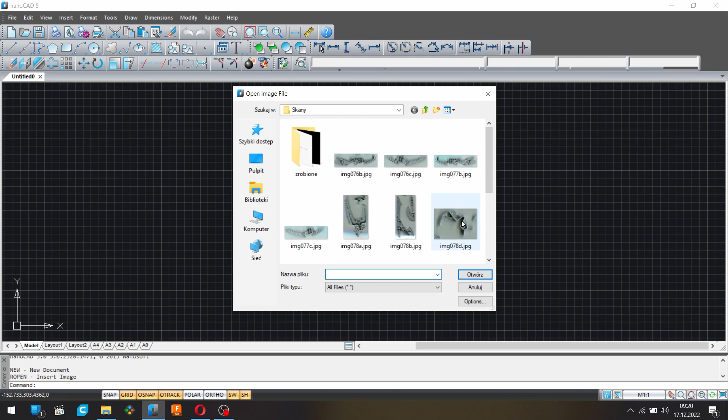We're going to model something small and easy today, because I hope to do it all in one go from start to finish. This is one side. It was D, so now we need 7, 8, 7, 9. Here we go. I'm going to save it. Drawing 15. Okay.

When I sketch on reference pictures, I like to change my line color to red. It's much better to see. Unless the part is red, of course, then you want something like bright green.

I make my reference pictures by scanning the parts flat. You could scan them in 3D, which is much more advanced and useful for bigger, more complicated parts. But for small parts like this, the flat 2D scan is perfectly fine.

But I also have the part itself in my hands, so I can rotate it, I can look how certain features look from the side, and I also have calipers that I'm going to be using to take some dimensions that are hard to take from the reference itself, or dimensions that cannot be taken, like the third dimension, the height, because we have width and length, but we don't have height, so we'll have to check the height with the calipers on the real part.

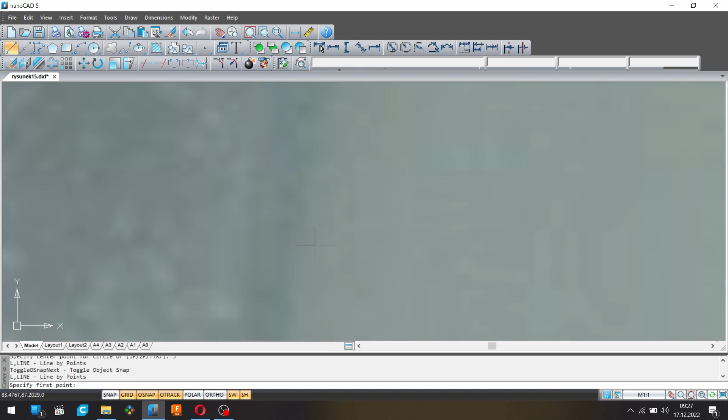So again, we're going to zoom in, not too much, because if we zoom too much you can't see anything. And we're going to zoom just the right amount, pick the point on the line, and now we are not going to pick the other point because it's harder to again aim. We're going to go past the line and align those 2 parts so they're the same angle, and there we go. So now this line will be our reference.

Now we need to rotate this picture so this line is parallel to our grid lines. The way I like to do this, we're going to move it a little so we have space. I like to rotate the reference so the line is in the right upper quadrant. The angle here is not really important.

Now we make a horizontal line. We mirror our first line, and now if we rotate from this point, we can just grab this point, and now our first line is horizontal. We can rotate it by 90 degrees, so it's more convenient. Oh, come on, F8, there you go, and now our line is at a perfect angle.

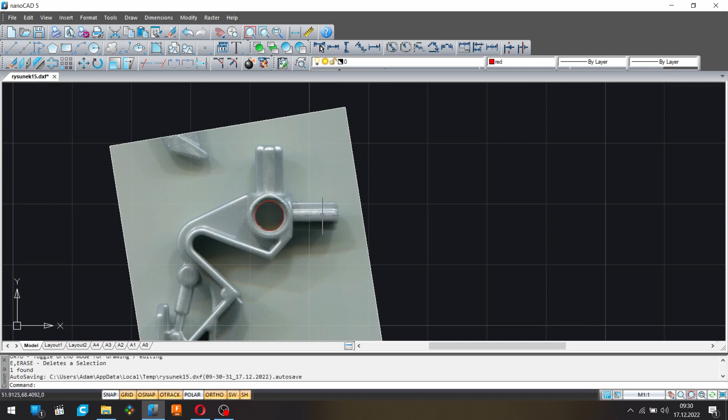The easier one is to use the knowledge that the Lego connection points, whether they are Technic pinholes or big connectors, are on the grid, and the grid is 8 millimeters. The features on the grid are 8 millimeters apart. So if we have a part with 2 pinholes, not necessarily one next to another, you know that the distance between them is a multiplication of 8 millimeters. So you could find the center of those holes the same way we did for this one, measure them, count how many 8 millimeters should be between them, and scale the reference appropriately.

I find that it's not very accurate. Sometimes you could introduce error into this, especially if the pinholes are very close to one another.

So actually the better way is to find the longest distance on the part that you can, draw it, see how long it is, and then measure the actual part with your calipers and use this measurement to scale the part. It's much more accurate, and I like to do this way.

Alright, so I'm looking at my part. Sorry, I don't have the camera on the part, you can see what I'm doing with my hands, but the stream was very last minute.

It's because basically I can do this only on weekends, and next weekend is Christmas. Wait, no, is it? Yeah, next week is Christmas already. The weekend after that is New Year's Eve. So the next time we could possibly do this would be 3 weeks from now. So this was the last time we could do this, and I'm not very well prepared, but I think we can manage it, and you'll have to forgive me because it's a first stream. I promise it will get better if I do this on a regular basis.

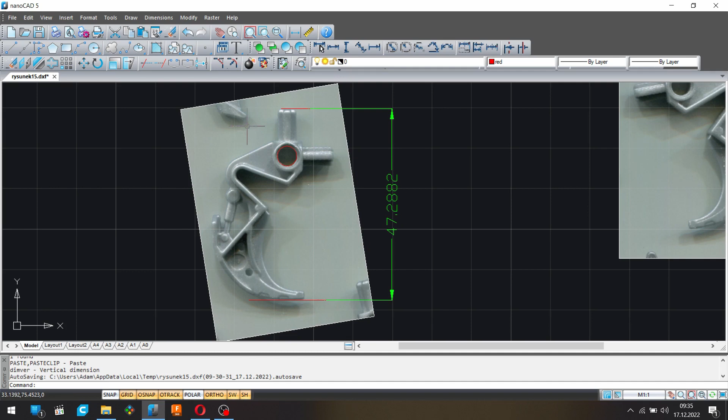And I found by doing this many times on many different reference scans that my scanner scans the parts almost perfectly, almost to a one-to-one scale. But if I double check and correct it a little bit, the parts will only be better for that. So now I'm going to use my two dimensions, the physical one and this one, to scale this reference image to the perfect one-to-one scale.

So I'm going to use a calculator. I'm going to put the dimension that I want first, so it's 47.04, divided by the dimension I have, 47.2882. And this is our scale factor that we need to scale it to. I'm not going to write this, I'm going to copy this.

I'm going to scale this whole group. Specify scale factor, we need to change to a comma, and there we go. You can see that now the length is the perfect 47.04 that we measured from the part.

So now we can expect this whole part to be perfectly scaled. Now we need to do the whole thing again to the other reference. Sometimes if the part is symmetrical, you can get away with doing only one side, because everything on the other side is in the perfectly same place. But in this part, although it looks symmetrical, there is a small difference at this injection port. Here it's concave, convex - it's inside of the part, and here there's a dome, it's sticking out. So to basically pick up this diameter, which would be extremely hard to measure with calipers, we will have to use the other side too.

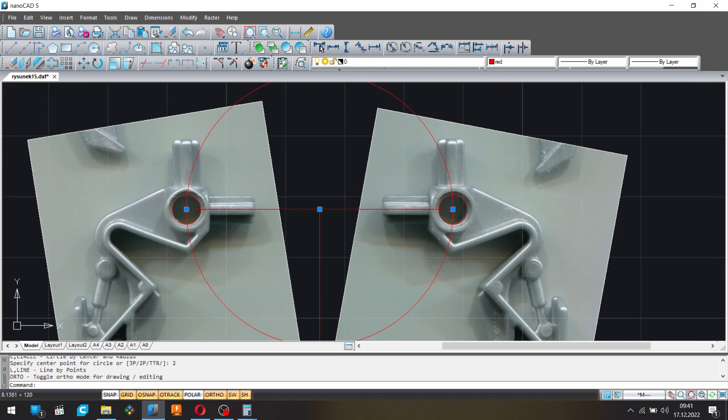Okay, we will just have to add a mirror line between them, right in the center. And we don't need anything on this reference, because we'll be first working on this side, then flip it and only adjust the differences.

Okay, so now we will use our center of a circle, but we won't be using our circle because it's some weird dimension that we don't know and is probably not accurate. We're going to use our dimensions of the Lego pinhole that we know, and those are 3 circles. I'm going by diameters, so it's 4.95, dimension 6.3 diameter, and the last one is D for diameter, 7.4.

We don't need our line, and you can see that the part is scaled very well. We can trust our dimensions of this reference, and we can now start drawing the shape of the part.

We will be using nanoCAD to draw the flat reference, and then we are going to import it to Fusion 360, and we're going to add our third dimension there. We're going to 3D model our part, and you could actually skip the nanoCAD and do this whole thing in Fusion - import the reference pictures to Fusion, draw the reference there, and do everything in one program. The reason I do this way, there are actually 2 reasons.

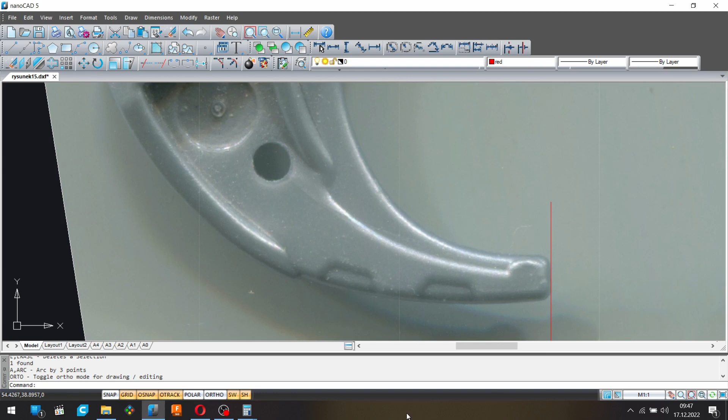So we'll have to do it like this. Almost the same length - this one is a little bit longer. It goes to this point here.

Okay, we need three points to pick up the arc, and the farther they are spread apart, the more accurate the arc will be. So we'll start here - here's one, here's the second one.

And now again we could use a point, but you can see that the difference right in this region can get pretty big pretty fast. So rather than specifying a point, I'm going to go past the end of the arc and, looking at this region and this region, find the best way to click so the arc is as tangent as we can across the entire length. Okay, here we go.

Those lines will cross here, so we can extend it. Now we will use the center of this arc to pick up this smaller arc, because those two arcs, while having different radii, are concentric.

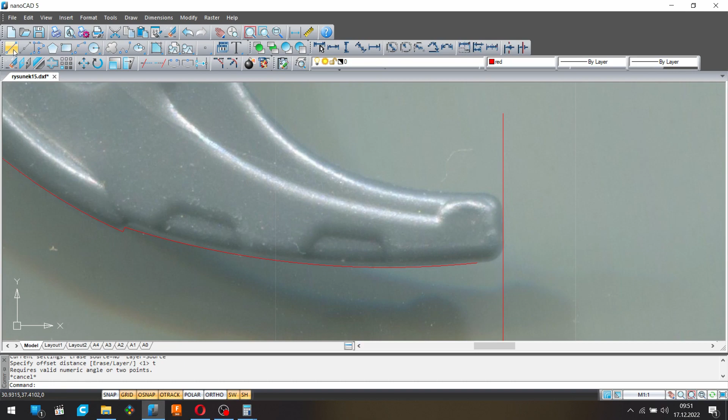It's very inconvenient. So we're going to measure the distance between this line and this line. It's kind of a hacky way, but you have to work with the program on its own terms. 0.94 - so it's probably 0.95 originally, and we're going to use this.

So we put in the offset, 0.95, enter. We can offset this line. You can see that it lines up perfectly.

Now we need the size of those cutouts. Oh no, right, let's start here. Let's do this side, right about here. Let's do this side.

Now, we could draw the fourth line, but the angle between those two lines and those two lines would be different - it would be very hard to pick up the same angle. So we're going to make it easier on ourselves by using the left cutout we already drew.

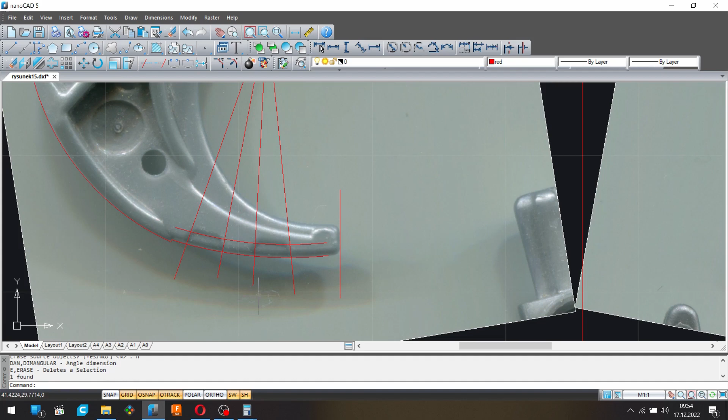Now we can be certain - I can actually prove it to you. Here we have, oh, it's not very accurate, I'd have to change the accuracy, but we have around 9 degrees, and here is the same. So we now don't need this line at all - we can trim away all the excess.

Now we'll just have to round off these edges. Another feature that was very useful in AutoCAD for this - and isn't working, or I don't know how to do this in this program - is you could draw a circle that was tangent to 3 lines.

So what I would normally do with this corner is just draw a third line that's also tangent to this rounded corner, and then use those 3 lines to make a perfect rounded corner that matches the reference. You can't do this in this program.

The only way is to use 2 tangential lines, and for the third dimension you have to specify the radius. So it's not very convenient, not very accurate, but the other way to do this is to use a 3-point circle.

Measure - let's do this here - measure with 3 points the radius of this corner. Oh, come on. There we go. We're doing this just to know the radius. 0.45.

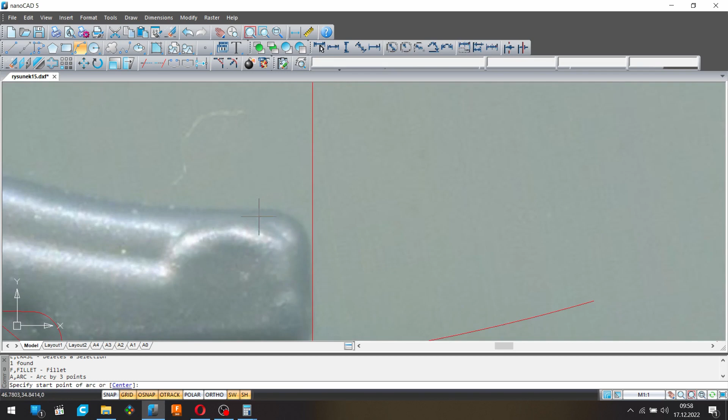We can now do the same thing from the other side. And again it drops off, and we can approximate this curvature with two arcs. Sometimes the shape is more complex, the arc might change more drastically, or there are some other geometries involved, but here we are fine with just two arcs.

But now the challenge is to make them tangential. Again, in AutoCAD it was very easy to do. I won't bore you with the details, but here we have to again do a little bit of a hack job, unfortunately.

Let's find the center. Here we go. Now let's do TTR - tangent, tangent, and our radius was 8.1, and you can see now that those two, the arc and the circle, are perfectly tangential. So again, trim off the excess, and we made this beautiful curve with two arcs that are perfectly tangential.

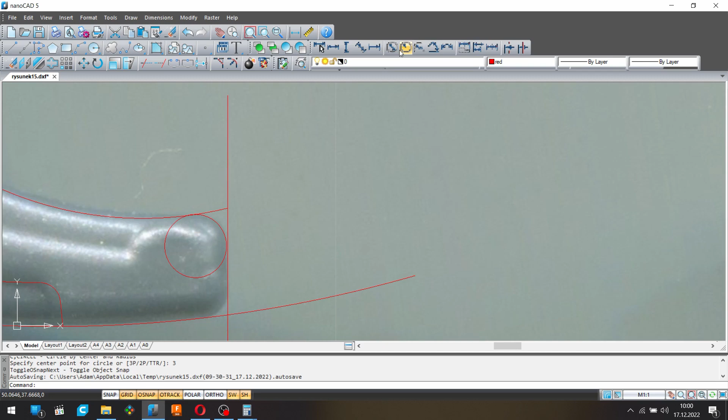We need to round off these corners. Again, we will measure them with a 3-point circle. There we go.

We have another tooth here, this little step, but those two lines, the bigger one right here and the little one right here, are parallel. So we can actually find out the angle first from the bigger one. We can now use this as a reference.

There are some more details here that I would need to create this corner, but I'm going to move along. We're going to circle around and come back to here. There's no particular reason for it - I just sometimes like to leave a little more challenging stuff for the later time. I just like to go with the flow as I do this.

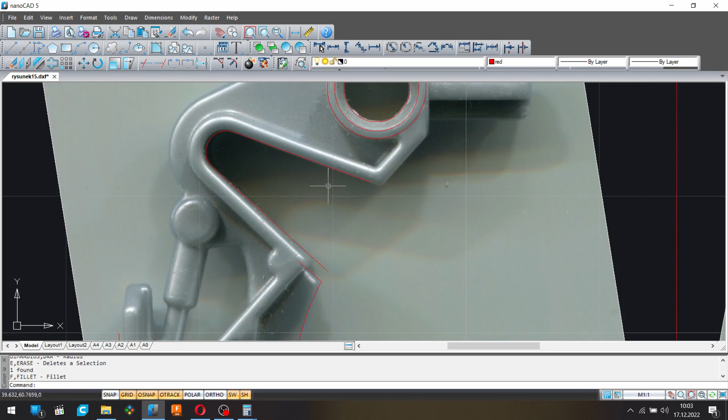I'm going to shorten this line so we don't mistake it for data for this line - this is something different. So let's just sit here for now. Okay, now we can make this corner around here.

Wait, actually, give me one more minute. Oh, there we go. I put on some music, but I have to use my headphones so you can't hear it, and Instagram won't flag me for the copyrighted music.

Okay, now we can continue. Those lines. Oh no, I can't hear myself think with the music - I wouldn't be able to comment. So no music for me, but turn on music you like to accompany this stream. We would have music if Instagram would be a little more tolerant.

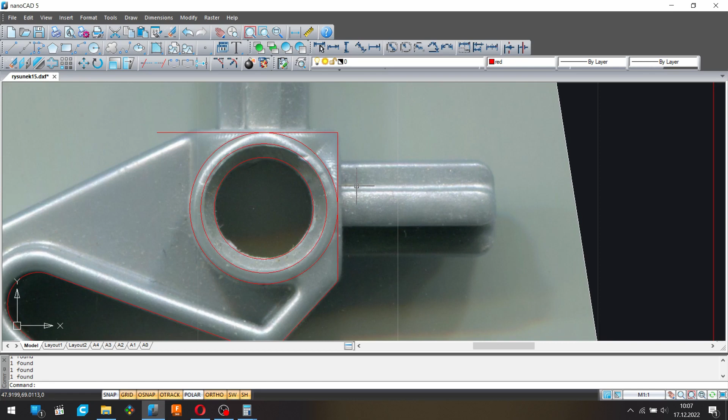So there is a cylinder here that is a base for a disconnection point, and there is a half of a cylinder here for a disconnection point. But it doesn't really matter, we can just draw the outside dimension. We don't need to draw the line where those two cylinders merge - it would be of no use to us in the 3D modeling software, and it will come out naturally as we model this. The only thing is to remember that when you 3D model, make cylinders here and not just flat, and everything will turn out the same way as it is here. So we can ignore it for now.

I don't want to catch the beginning of this arc, so we'll go back a little. Let's say here.

Are those two circles concentrical? Yes, they are. So we can use this. Oh no, we will have a problem with this being tangent to this line. Ah, damn it.

Damn you, nanoCAD. Why don't you have so many cool options that AutoCAD has? How do I do this?

I think I'll have to go the other way with it. I'll have to start with the circle and now do this line again.

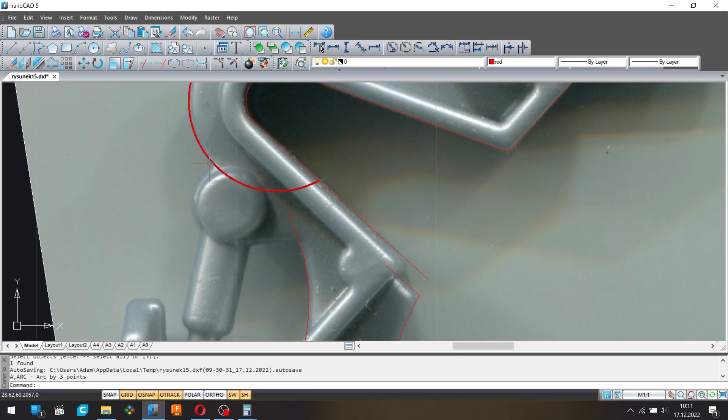When we pick up the center of this hinge for the piston, we can draw the outline. So let's just skip this for now. Skipping...

Skipping features in certain places can be very dangerous and can come back to bite you in the ass, because it might be difficult to remember all the places you skipped. That's why I wanted to skip those parts first, but I stopped myself and thought let's do them now, because I wasn't certain I would remember to come back to them.

So when you have a big part, try not to skip certain places. It will come up eventually when you import the sketch to 3D modeling software and you have gaps. You don't have closed profiles, you can't extrude from them, and it will be clear where you skipped something and where you need to come back and redo it.

But you would have to open the sketching software again, redo this, import the sketch again to the program. It's just a pain in the ass. So if you skip it, be sure that you remember to come back to it.

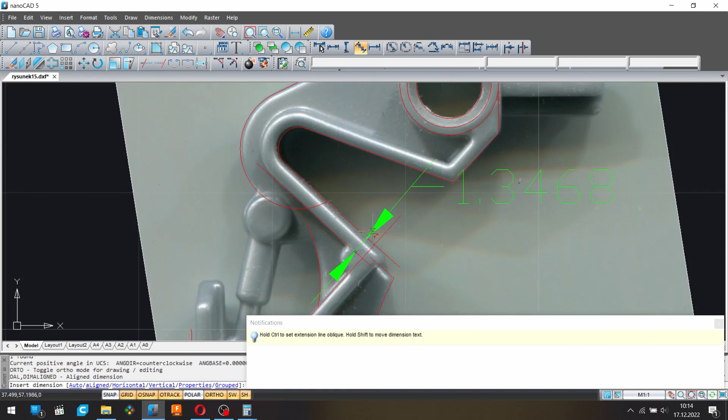What the hell? Maybe let's cheat a little. Take this, okay, now it will be easier. 1.35 is the dimension.

We use the offset command. 1.35, and now we can go crazy with the offsetting. This offsets to here, this to here, this to here, this to here, this to here, this to here. Yeah, it's the same offset, so we can do this one also.

I think that's everything. Now let's patch all the connections. Don't need this, don't need this, this. Now we have our nice corner.

We'll come back to round it off in a minute. Everything's okay here, trim this. We'll round this off in a minute.

Okay, seems everything is fine. Now we can do this circle. Go.

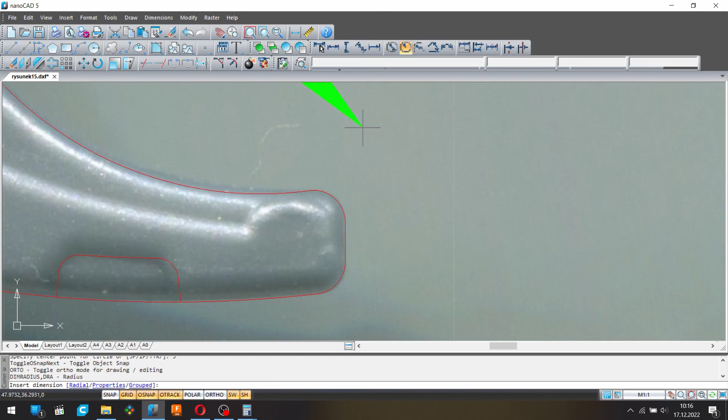0.56. How was it here? 0.7. Will 0.7 work here to keep it consistent? Let's see how 0.7 looks. Yeah, kind of. Looks okay, we can use 0.7.

Okay, going on the same path. Here we go. Here we go.

There, maybe we'll have to see in the 3D phase if it's even possible. I won't be rounding off the internal corners, I'll just leave them as they are here. The only one we have to absolutely do is this one, so the lines connect.

Again, I was trying to do the AutoCAD thing, draw a third line and define the circle with 3 tangential lines. You can do this. Let's measure this corner with 3 points.

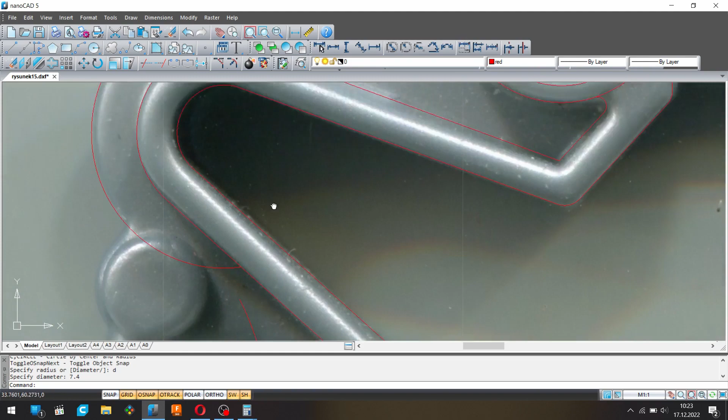This corner is fine, everything is fine. I'll try to remember that from this line up everything is already finished, so I won't be going back there to even check.

Okay, maybe let's tackle this piston now. Pistons are very fun to make on the Bionicle parts, as long as you have a prepared certain approach to them. I like to do it in this way.

First, I pick up the two hinges. This one. This one. And the line between the two centers. Come on. Here we go.

Center is our axis of both of those two cylinders, and we also picked up the angle of the sides, so we can use this line to pick up the diameter of both cylinders, the bigger one and the smaller one.

There we go. But you might suspect that the distance from this line to the center and this line to the center probably isn't the same, and you can actually even see it that this dimension is much bigger than this one.

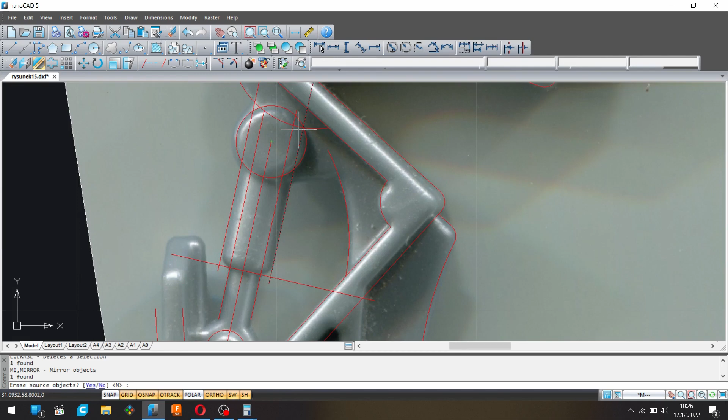Let's do this one more time so you can understand better what I'm doing here. I draw those two lines, and now if I mirror this part from our axis, we'll actually get rid of the original one. Yes, now they are both on the one side.

The one from this side disappeared. It's this one here. Now you can see that there is a difference between them. So if we moved this line to this line, then we would have the same gap on this side. So to make both of the sides happy, we'll find a line that's between them.

Let's use this one. We don't need this. And now the line is not as accurate to this side, but if we mirror it back to the right side, you can see that the gap we have here, we also have here.

So both lines are the same distance from the best lines they could be, and now we can revolve it and do a cylinder out of this profile, and it will be the closest we can pick up to the original size. So now we'll do the same thing with the smaller diameter.

Again, let's do it a little quicker. There we go.

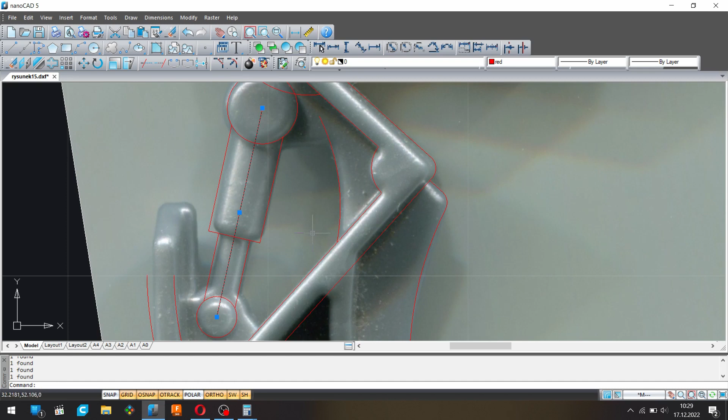I like to leave the center line because we will actually need it in the 3D phase to revolve half of this profile to make a cylinder out of it. So I'm not going to get rid of that. I'm going to extend it so we can use it later.

This is actually unusual. On other Bionicle parts we would be done, but this one has this fillet right here. Not sure why, but let's model it how it is.

Because we are making a recreation, we are not allowed to make decisions about the way this part looks. It might be stupid, but you know, we're doing it the same way someone did it before.

Okay, that was a little harsh. It's not stupid, I would just do it a different way. Not sure what the reason was here, but it's not stupid. There might be actually a very good reason and I just don't know it. Let's trim the excess.

Mirror that. Get rid of the excess. There we go. That looks pretty great.

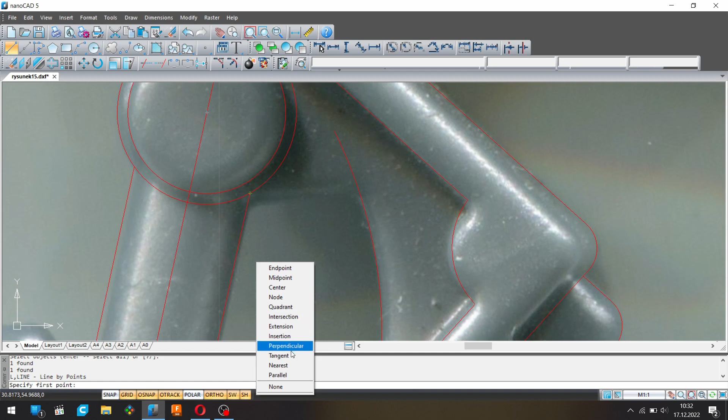I hate to be a broken record, but in AutoCAD you would do Control Shift right, choose tangent, pick up the circle, and you could have a perfectly tangent line to the circle, but I have no idea why it doesn't work in this nanoCAD. Maybe it's available in the paid version. I'm using the free version, but I have no idea why the menu is here, but if you use it, nothing happens. Not even a command shows up here. No idea.

So let's do the same trick we did earlier. Let's pick up the angle, make a line that's perpendicular, move this to the circle, there we go. Now this will intersect here. Don't need this. There we go. Trim off the excess.

How does it work here? Maybe like that. This is the same thing we had with those cylinders intersecting here. It will actually turn one way or another in the 3D modeling phase. So I'm not really concerned how this corner here looks, because when I extrude this plane and revolve this cylinder, they will meet one way or the other, so it doesn't really matter to me.

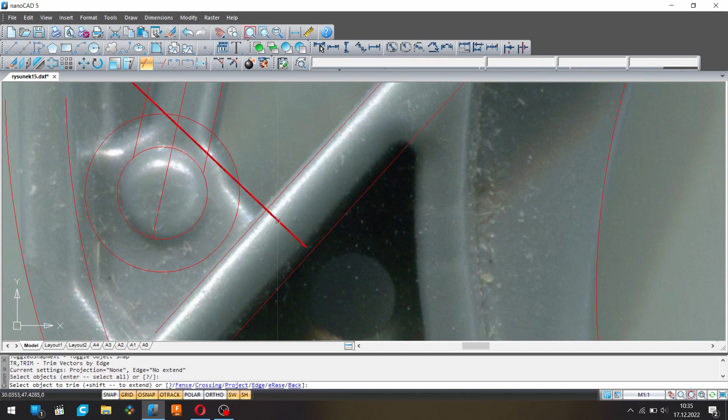Yeah, that looks like it should be like that. And actually this looks to be mirrored from the rotation axis of the cylinder. Let's try if this will work. Kind of. Oh, not really. It's perpendicular to this line that we don't have here.

Let's get rid of that for now. How to do this? Okay. Let's do this corner. Wait. The arc here comes in contact with a straight line, but I look at the part, and they don't seem to be tangential. So this is actually more convenient for us.

This little face seems to be vertical, so we can just use a vertical line. There we go. They intersect. We have this little sharp corner here, not tangent.

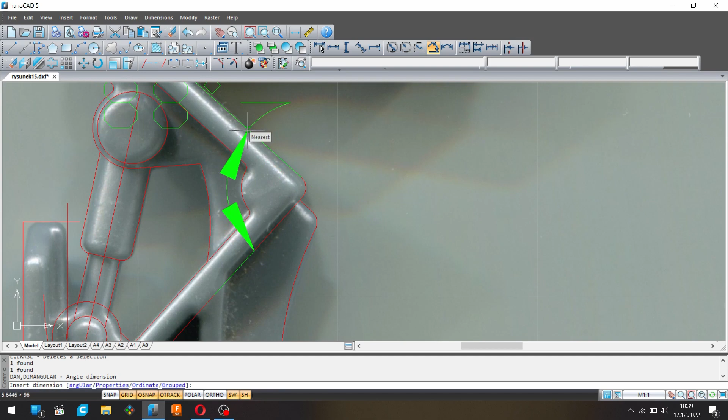Let's assume this, and we can actually add those two lines supposed to be perpendicular. Not really, they just look like that. If we actually make it 90 degrees here, it will not be very accurate. It would cause error. But also, wait a minute, those two lines, they should be...

Oh man, I missed this. I'll have to redo this in a second. But let's finish this first. What was the offset? God damn it.

That's how you pay for crappy memory. The arc here was what exactly? 0.7. I thought 0.3, but the 0.3 was from the inside. 0.7. Here to here. Here to here. There we go.

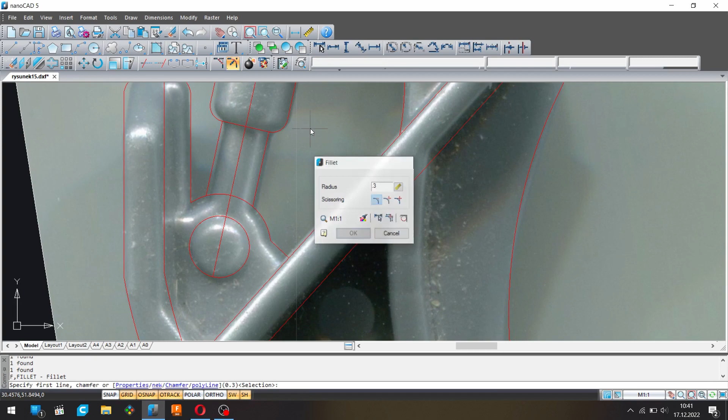Okay, inside was 0.3. Let's do this definitely here. Maybe not, maybe not. No, let's just leave it unfilled. Okay, let's do this now here.

This doesn't go as far. This only goes to here. And we have this line here, like that.

Extend this. Extend this. And this. There is an extend command, but I find it quicker and easier just to do it by hand.

I can show you how the extend works. The trim works like it deletes the rest of the line to the next point where it crosses with something. So the cutoff works like that, and the extend, it's easy to imagine, works exactly the opposite way. It extends to the next feature. So basically we can do this, or we can extend it past the point and trim. Doesn't really matter.

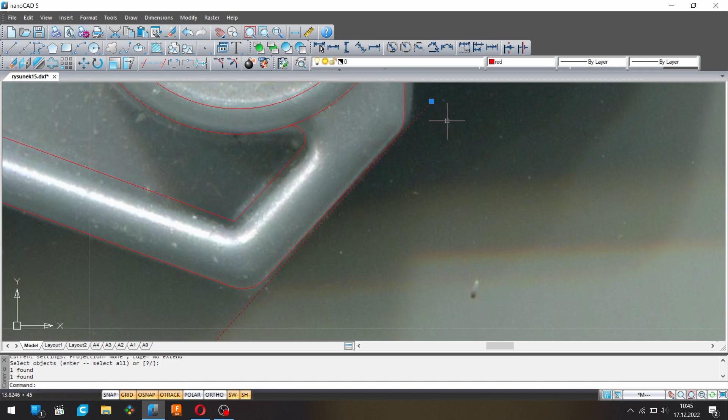This thing, okay. This line and this line are supposed to be basically one line, but I didn't figure it out earlier. Now you can see that they are almost parallel, not really, because the distance here is a little bigger than the distance here. They are very close though, but nonetheless they are not on the same line.

So I will have to move every feature here, and unfortunately this too. So we'll have to redo this all from scratch. This will be now correct. And the offset was 1.35, this to here.

Okay, and the inside radius was 0.3. Oh, it didn't cut off. Worked fine. Maybe no, should cut off the rest. Yeah, that's what I was talking about earlier - the fillet command sometimes has some problems. I'm not sure what they are caused by and how to get around them. I don't know how to work with it sometimes.

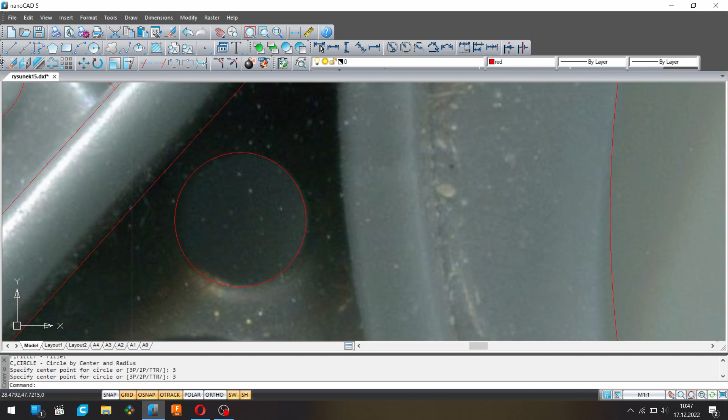This one will dictate our diameter and our center of the circle, but this one will only dictate the center, and to have uniform... well, actually, let's redo this one too.

To have the same diameter, what's the diameter here? 1.89, so let's do 1.9. D 1.9, and same here, D 1.9. Now we can be sure that they are both the exact same size. It doesn't really matter if they're 1.89 or 1.9, I just like to make things consistent.

The actual possibility is that the guy who first designed this didn't make those holes neither 1.89 or 1.9, but like 2 millimeter. Now I'm picking it up with an error after the ABS shrunk in the mold. It's not extremely accurate. I'm not redoing the exact same thing that the Lego designer did so many years ago, but you know, it's reverse engineering - you have to expect this kind of inaccuracy and just work with it.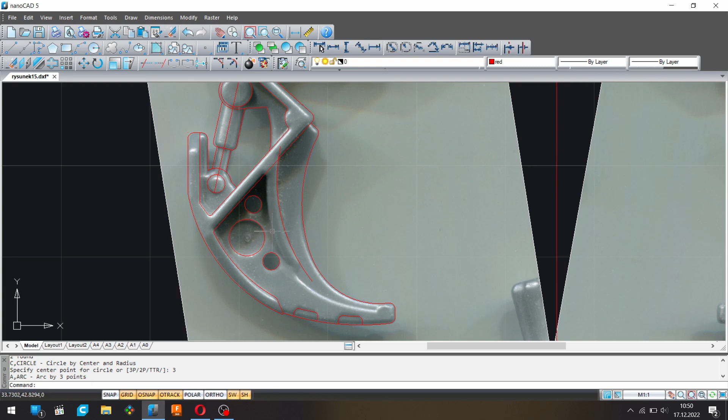For features that need much better precision, like connection points, pinholes, axles, you would have to work out the perfect dimension the other way. You could measure it with calipers, 3D print it and prototype it, and check the fit with other parts. You would have to be much more precise here, but when we just pick up the outside curves of some blade or some holes that aren't even connection holes, it doesn't really matter if they are 0.89 or 0.9 - it doesn't make a difference. And like I said, you have to expect that they won't be accurate either way, so if they are not accurate no matter what you do, then you can just not think about it and keep moving.

It doesn't look like 0.3. Yeah, something's wrong here. But this might be 0.3. Yes, this one is. But this one, I also have the error here. As you can see, there's a gap. Let's measure the radius here - 0.35. So actually 0.3 should work.

How does the 0.3 look again? Let's leave it, doesn't really matter. The center of the circle - here we go, around here. Again, just to close off the loop, the profile. Okay.

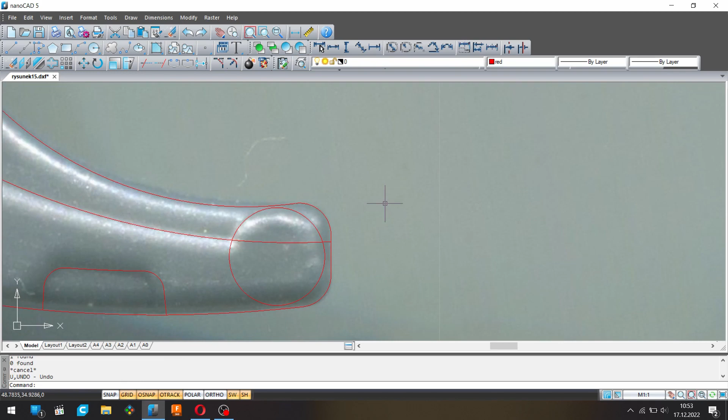No, I messed it up. Again... would be nice if this circle would be tangent to all these 3 lines, or at least those 2 lines. How to do this without my favorite AutoCAD command? What's this? Is it point? What does a point do? Oh, you can pick it. Never mind. How to do this?

It doesn't really need to be tangent to this one or this one, but it absolutely has to be tangent with this one. Oh, I know how to do this. It will be another hack job, but I've lost count of the hack jobs we did today, so it doesn't really make a difference anymore. There we go. Good enough.

Let's check that we didn't miss anything. Everything looks fine here. Everything looks fine. Alright, so we have... I didn't save for this entire time, god damn it. Thank god it didn't crash, we would lose all this work.

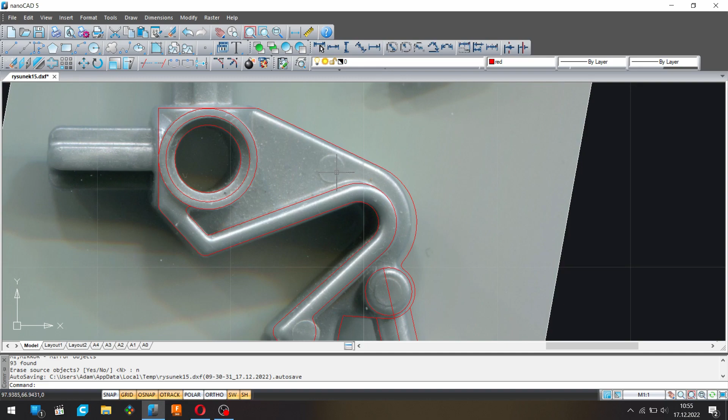I will not be modeling the artifacts left after the injection molding, especially since they can differ through different parts. Not only could you have different molds with artifacts in different places, but even from the same mold the artifacts could sometimes show and other times not. They could be once above the surface, then below the surface, so it's really a waste of time to model all those artifacts, because you will always get them wrong no matter what you do. It's best just to skip them entirely.

Let's not care about this one, everything looks okay here.

I will not be modeling the copyright logo or the part number. I don't need it for anything, so the only difference is this diameter.

Okay, don't need this. Trim here, here, here, here. This looks fine. Okay, so we are done.

Now we can import those flat references to Fusion and do our third dimension and 3D model the part.

Okay, so now with the sketch in nanoCAD done, we drew from references both sides of the piece, we can now import those lines to a 3D modeling program. I'm using Fusion 360, and we can use the sketch we made to 3D model the part with some volume to it. So first we're going to start by inserting the sketch we already made.

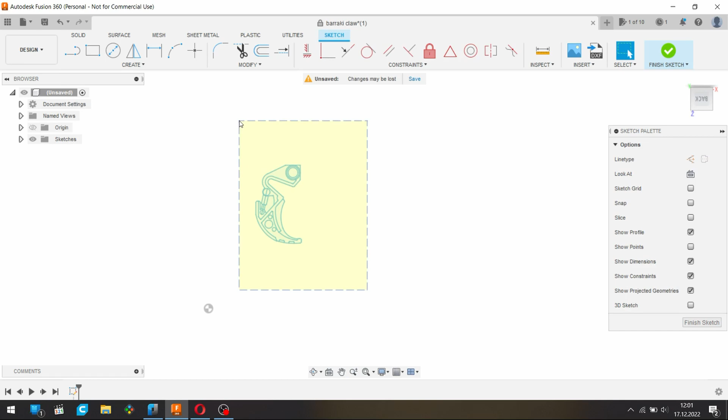Let's start with this part. I like to position the sketch so the reference point, the origin, where basically all the axes intersect, I like it to be at the center of the pinhole.

Oh man, I hit escape again. Point to point. Okay, and now this half of our part is in the correct place. We can finish our sketch. I'm going to rename it to more easily find it later. I'm going to name it front.

Now we need the other half. So again, XF, select, okay. Now we need the... wait, let me see. Okay, we need this one. So we can delete this one. We need to mirror, mirror line. Okay.

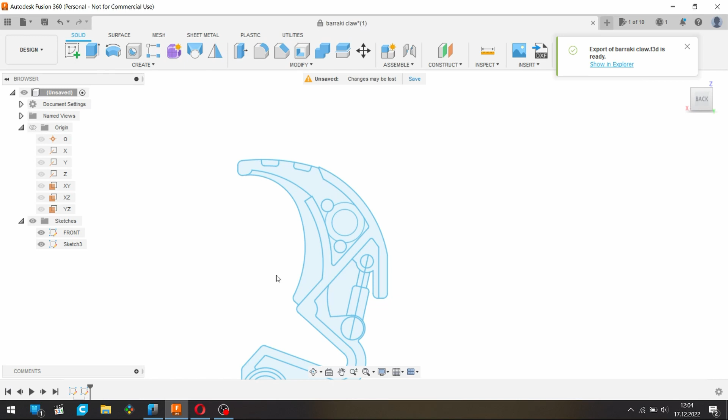We can save, and I will try not to forget to regularly save our work. I'm not saving because Fusion 360 is a cloud-based program that wants you to upload all your work to the server. I don't really need this, and there is also a cap of 10 documents, so to get around that, instead of saving, I export all my files to my hard drive, and I have access to everything I need on hand.

Okay, so now we can start creating shapes with third dimension from this part, and basically what you need to do is look at the physical part you have and decide what order of operations you are going to do. You need to decide which profiles can be extruded at the same time, and which profiles are going to cause problems with some next operations.

For example, this feature here that's going to be extruded from this arc is tapered down. So this entire profile is at the set height, but this little appendage goes down to this plane. So the best way is to do this appendage first, because if I start with this plane and then cut off the slope of this part or model it in some other way, I'm going to have to look out for the planes we already made, to not cut them or modify them.

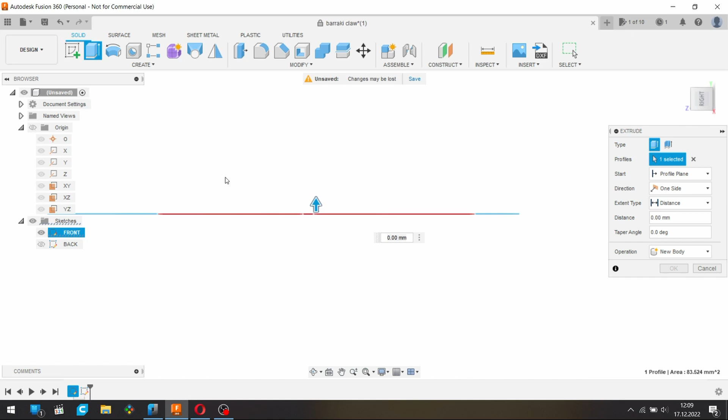I like to position the plane that I'm extruding from - this is basically, which plane is it? I can see it. Wait, I like to position the plane in the middle of the part. You could position it on one side and work from one side to the other, but the problem is that there are many features that are in the middle. So if you would do this way, you would always have to go from one side to the other.

And then you would have to move the feature you started so it's symmetrical on both sides. The better way to do this is to work from inside out, so you know that the features you make are always in the middle and they are always symmetrical. Also, the dimension we need from here to here is much easier to check with calipers than the dimension you would need from the center to the half. So that's just a natural way to do this.

I'm going to use my calipers now to check what width this part is, and it says 7.48, so it's probably 7.5. We can round it off, and we have some starting geometry.

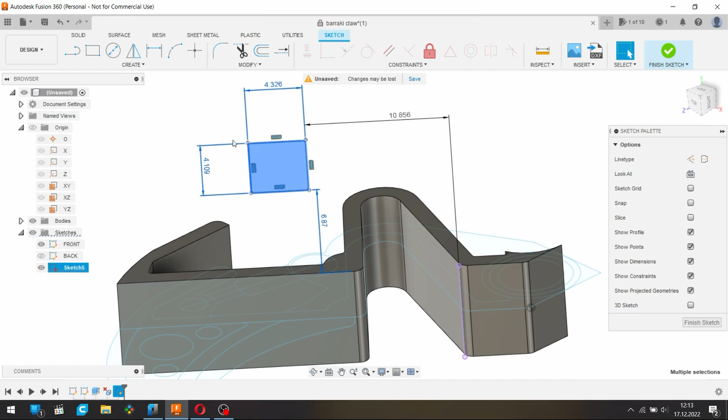Like I mentioned earlier, there are situations where you might actually want this, but if you have a picture and you want to draw on the picture to recreate the shape, then this situation is very annoying to deal with. So to lock this in place, I would have to put a dimension here, another dimension here, and you can see the rectangle now can't change shape, but it can still move. So now I put a dimension here, and now it can only move up and down. I put a dimension here, and now after 4 dimensions, it's finally locked in place and I can't move it. So it's a really big problem and a pain to work with. So when I create a sketch I'm going to model from, I like to do it in drawing software, it's much more convenient.

Okay, now we can get back to the job at hand. I have my rectangle. I know it from the physical part, I can see how the shape looks. I can see that the sides of this appendage will be flush with the sides of this extrusion I already made. You can see that I can't move the rectangle up and down, but now I can move it side to side.

We can use the dimensions we drew on this sketch already, but again we have to modify it a little bit, because we need a point where this arc intersects with this line, and where this arc intersects with this line. The problem is we have fillets right here and a small one right here, so the way it's drawn now, those 2 lines don't actually intersect and we don't know where this point would be. So to get around that, we're going to extend those lines so they meet our wall, and now we have those points right here, and we can add the rounding fillet later.

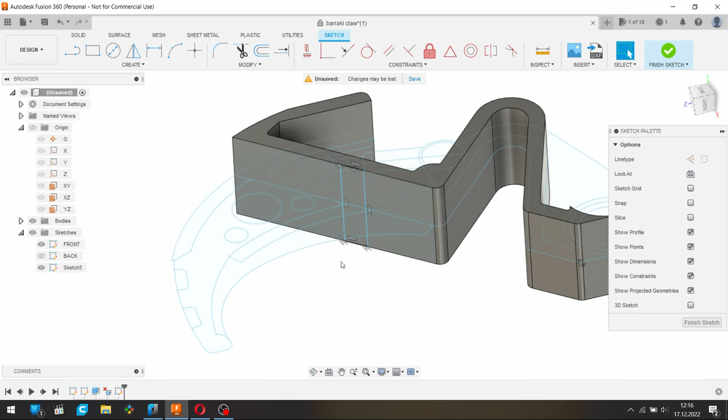So we finish sketch, we get back to our sketch. And now, if I hide the earlier sketch, you can see that we don't have anything we can use. We have only this one sketch, this one rectangle. So to use the geometry from the previous sketch, we're going to make it visible, and use the command project. We want this point from the earlier sketch and this point from the earlier sketch to appear in our newer sketch. Now you can see that even if I hide the previous sketch, the points are still here.

And now we can say that this line is going to be on this point, and this line is going to be on this point. With the sketch turning black, it means that everything is constrained. I can't move it, I can't rotate it. It's basically as you want it to be. In general, you want to constrain all your sketches, so you can't accidentally move something by accident.

But again, there are instances where it's more beneficial to leave the geometry unconstrained, especially if you are fine-tuning something and you want to see how the geometry will look with this sketch, then change it a little and see the difference. So you always want to choose the best way to constrain your sketches for the task at hand.

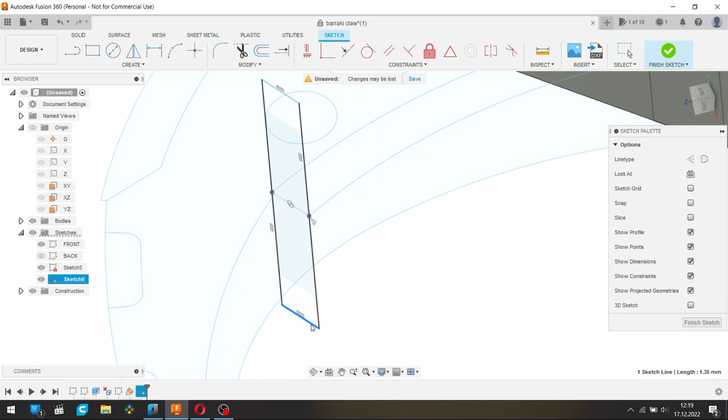We're going to constrain our rectangle to these points. Now you can see that we can move the rectangle up and down. Actually, I'm going to add one more constraint, midpoint. I want this point not only to be on this line, but to be at exact center of it. So now if I try to stretch it down, you can see it stretches the same way up, so I know that the rectangle is perfectly at the center of our part.

It's not necessary, you can do this in other ways. For example, you could add a dimension to this rectangle, and then say that the distance from this side to the center... no, I can't because I created this constraint, so let's delete it, and now I can set that the top side to the center equals this, whatever it is. I can change this, and it will update, divided by 2. So if I change it to 8, you can see this changed to 4. So it's always in the middle.

You can enter more complex equations here. I could add 1, I could divide it by some other dimension. So it's really helpful, you don't have to do the math yourself. You can just say that this thing has to be, for example, 7 times bigger than this thing, or this thing has to be as in relation to the other thing as this is to this. So it's really helpful, not really needed here, so we can do just the midpoint.

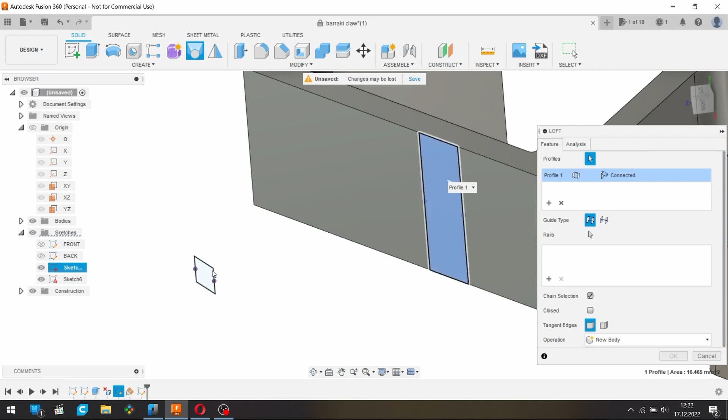Now we could use the command loft, but it's not going to have the shape we want. I'm actually going to use it and show you what it will look like. We want to choose our profiles, which we already do. So we add the plus, we want this profile, also this profile, and this profile, and you can see there is a shape that appeared between those two profiles we made.

But if we go to... let me just set this up, I'm going to set this to home, fit to view. Okay, now we can see that the end of this feature and the beginning of this feature are in the correct place, but the shape of this feature isn't as we want it to be. We want it to go at those arcs, but it goes straight. We could add another profile here in the middle, and it would be a little closer to the arc, going from this end to the middle and then to the end, but it still wouldn't go at those arcs.

So to fix this, we can, in the loft command, add something called rails. So the entire command would say: start at profile 1, and at profile 2 right here, but also don't go straight from 1 to the second, but use basically the tracks, the shape of the path we want to go from one place to the other. So we are going to add those rails, and then the shape will have the desired result.

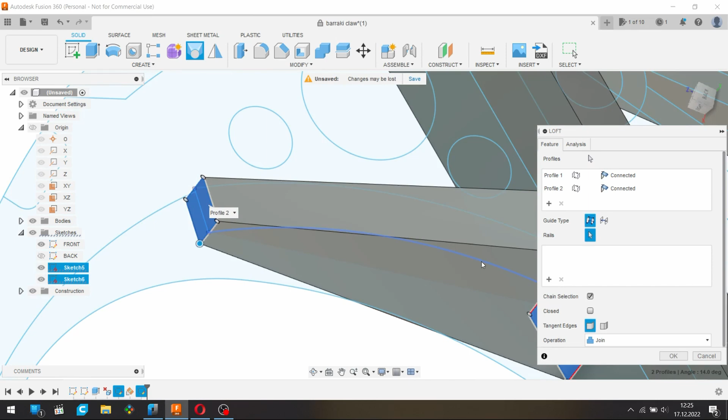So how to do this? One way is to add those rails that are here in the middle. Actually, I'm curious how it will look, if it will even generate. Here to here. Add those rails, one here, one here. Let's see how it looks. Well, it's actually not bad.

What I wanted to do is make 4 rails for each of the corners - one here, one here, one here, and one at the 4th corner. But because the shape is pretty uniform and the transition isn't very complicated, I don't think we actually need to do this. I think we can leave this as is. So we actually managed to make a little skip and saved ourselves some trouble, so we can move along with the part. This worked out the way we wanted it.

And now basically the same story is with this appendage. This appendage is a little different because it meets this plane, which we still don't have yet, at a different angle. So we will have to take that into account and remember that it actually goes to here, it doesn't just finish here, but basically it's the same story. So instead of commenting, I'm going to go quickly through it because you already know what the problem here is and how I'm going to solve it.

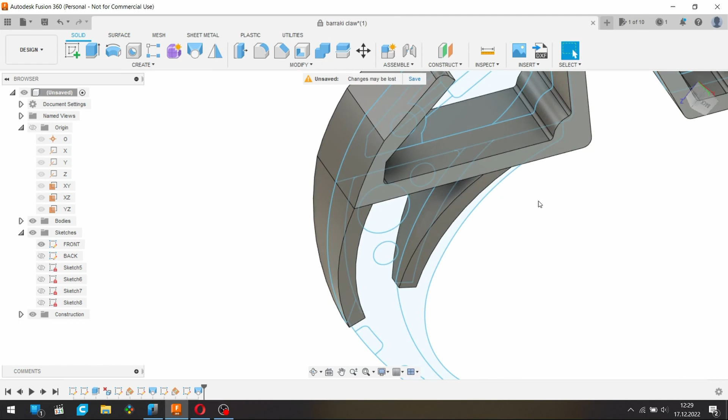Okay, looks good. Now you can see that, if you remember how I do it, this entire arc is one arc, so it would be nice if this face would also be basically the same, so we wouldn't have two faces.

Everything's okay. So to fix this thing that happened here, we can choose this face and delete it, and the program will use the faces around it to generate a filling face. So it deletes this one face that was here and fills the hole that is left, using the other faces around it and figuring out how this face should look.

So this works very nice. We have the shape we wanted. We have one smooth face here. We can continue. I'll export.

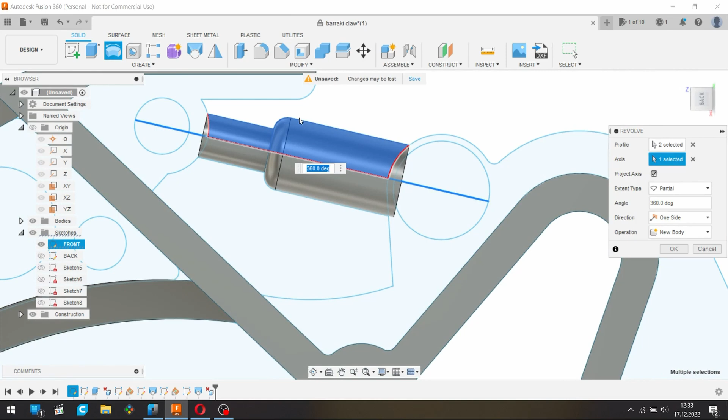So we want to revolve this profile around this axis, and you can see that we have a nice cylinder that also lines up perfectly to both sides because of the splitting we did back when we were drawing.

You can also see that there is a concave shape right here because of the way the piston meets with the other geometry on our sketch. We could leave it like that and then try to patch it, but it might be difficult if it gets covered with other bodies, so the best way is to deal with it now.

And we can do it by squaring off this end and also squaring off this end. Now we can edit our feature and we can add that we want to also revolve this.

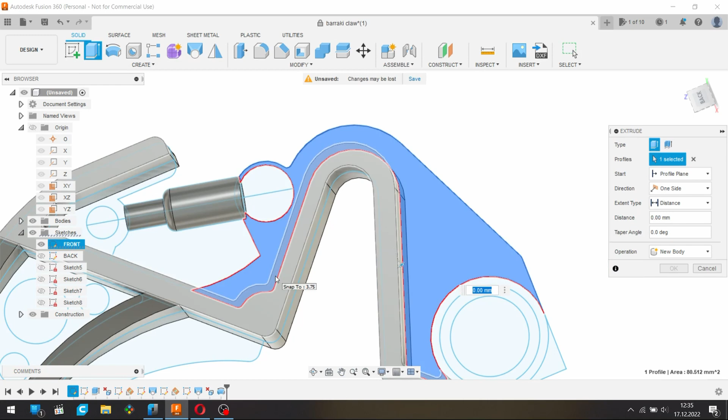Okay, so now we can maybe extrude this profile. Like I said, there is no real order to it. You just kind of figure it out as you go, which feature you can do next. Sometimes you make mistakes and you have to go back, because you generate a new geometry that screws with the previous geometry. You have to kind of try to get around a few things, so it definitely happens, but if you put a little thought to the way you approach it, you can save yourself a lot of headache.

So again, we are going to extrude it symmetric to both sides, like that, and the distance we want to extrude it to is taken from the part. I'm measuring 1.29, so it's probably 1.3.

Oh, I remembered, we forgot to add those splines back—splines, I mean fillets. It's not necessary to do them now, they would be very easy to add later also, but if we add them now, we won't have to worry about them anymore. I'm going to measure what radius we had here, 0.3. This one is also 0.3, so we can do them both in one operation. We want to fillet this edge, we want to fillet this edge, and we can type our radius 0.3.

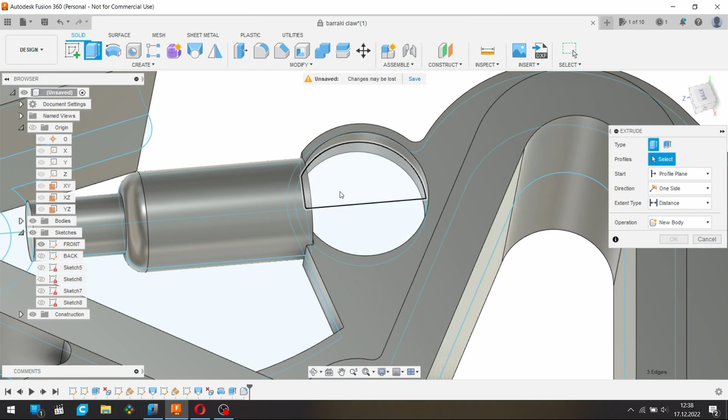We'll leave the pinhole for later. Now we can add this rivet, this pivot point for the piston. Again, symmetric, and the distance is 3.4.

Because we added some geometry with the revolve, you can see that's not supposed to be there. When I tell the program to intersect with the geometry, it assumes I want to cut away this geometry, because it doesn't know what the final shape should look like. It assumes that because we cross one geometry with the other, we want them to cut each other. But that's not true—we want them to join, to add on top of that.

3.4 again. Okay, you can see that it filled up nicely. It looks a little big, let me check that. 3.4—well, that's how it's supposed to be. Looks weird, but what are you gonna do?

I'm going to hide our sketch, and you can see that from this side everything generated very nicely, but from this side we have some problems. You can see there are some gaps here and here. We don't want them.

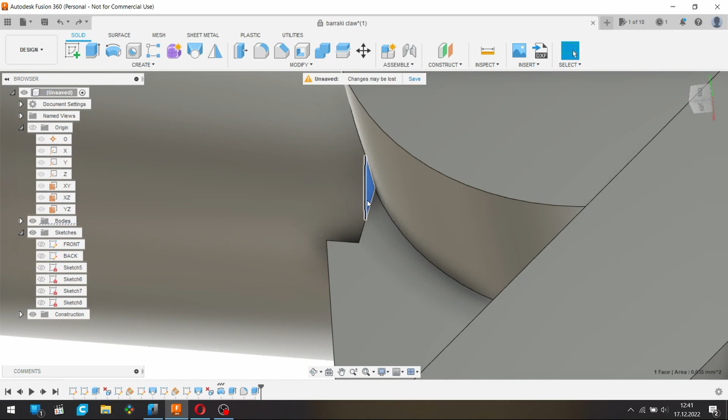So when this happens, you have to either add some other geometry to let the program know—you could point to this face, but also this face, and the result might be different. It might not be, but it might be. You could actually cut away something. There are ways to get around that, but with something as easy as this, everything works great. You don't need to add any more work to it.

Same here, you can see that filled up really nice, and also here. Go away. Perfect. Here, go away, and the side now looks really good. You can do the other side the same way.

And it looks really well. So we can move on to the next thing. Let me see. Okay, so...

Now I need to extend this profile, but I suspect it's the same width as this profile, so I'm going to check this extrusion—not this one, I think. Ready? Yes, it was extruded to 1.3 millimeters. I'm going to measure my part. Actually, I don't have good access to this part because I can't get in from here.

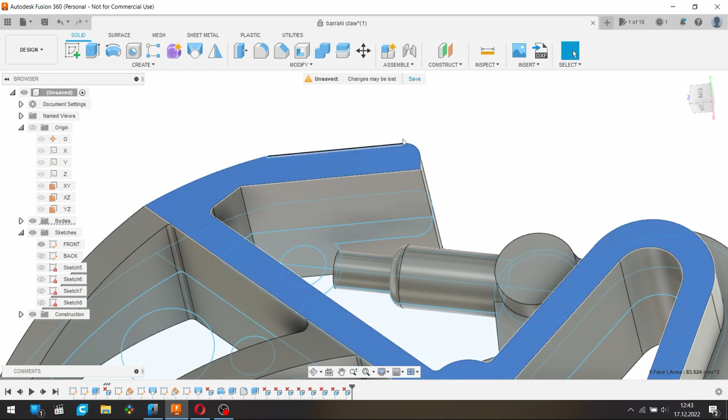So I'll measure the width of this region a different way. I can't measure this region for how thick it is from one side to the other, but I can check the distance between this profile and this wall. So I'm going to measure it on my part—give me a minute, I want to get this right. And the distance is 2.96. So I can do it this way.

I can extrude this profile, and instead of giving it some measurement, I can say just go to this wall. But I don't want to go to this wall—I want to go to this wall minus the measurement I have. So I'm going to offset minus, go below that, 2.96—I'll put 2.95, and do it not to one side, but symmetric to both sides. Now I have the wall, and I can check if I was correct about the same width for this place as well as for this place.

We have 1.6 here and 1.3 here, so it's a pretty big difference. There's a small chance I measured so badly that we have this much difference, but probably this region is thicker to allow the flow of plastic inside the mold. So it's actually good that we did it in a different operation.

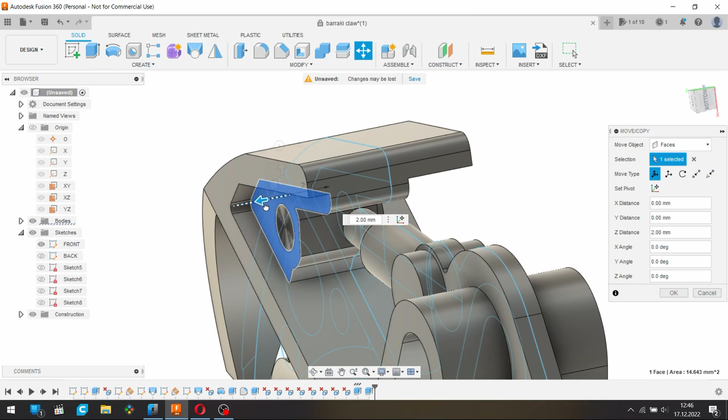If we would go to one side first and then try to basically—let me show you. If we were going from one side, we would have all the features here flat, extrude them to the other side, and afterwards have to move the sides to the appropriate place. We would risk making a mistake where the distance from here to here is actually different from here to here. We don't have to even think about that, because working from the middle to both sides the same way means everything is perfectly symmetrical.

Let's clean this up. Perfect. We can enable our sketch to check if everything lines up with it properly. Everything looks great, there are no mistakes. Looks really nice. Let's save our progress.

With CAD programs, there's always this kind of modeling tree which shows every operation you've done so far. We can go to the very beginning and I can go one by one through the operations, showing all the things we did. This is very handy for something I've done in this modeling process already a few times: if you want to go back to some feature and update it with the knowledge you have now. For example, I could extrude something else and see that those things don't line up, so I can go back to the first thing and edit the extrusion length so they line up perfectly. It's really nice that you can go back.

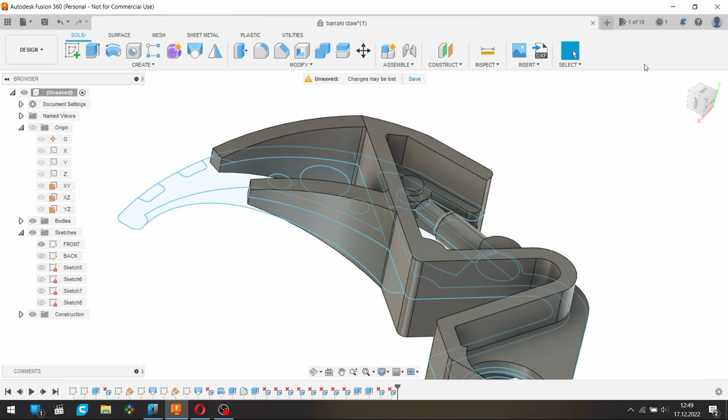With this, there's no reason not to save your progress as much as possible, because even if you make a mistake and save it, you can always go back and edit, redo, or modify the things you already did. So there's really no reason not to save, and you want to save as often as you can, especially if you have a risk of your PC or program crashing and losing your progress.

So to finish this side of the part and move on to the blade, we are going to tackle this pinhole right now.

Let me see how the cylinders were. Okay, I think I know everything. I'm going to open the dimensions I've written down for easier access. It's a technical drawing I did of some Technic part. The dimensions are some I found online, some I worked out myself by measuring parts and calculating things, and I have this little cheat sheet so when I model I don't have to remember all the dimensions and risk messing something up. I can just look at it and see all the dimensions I need right now.

So I'm going to move that to the side and use it to make the pinhole. I'm going to extrude this, symmetrical. Looking at my cheat sheet, 7.85.

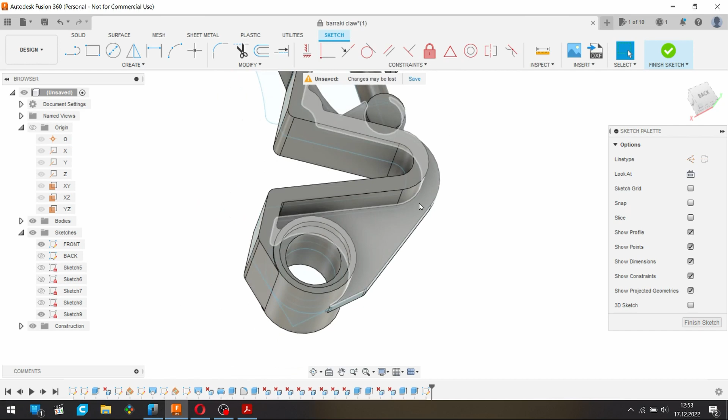The thing I'm thinking about right now is there are many ways to generate the same shape in CAD programs, but two of the most basic ways to generate a cylinder are to revolve it, as we did with the piston, or to extrude it like we did with the pinhole and all the profiles. If you create a profile that's just a circle and extrude it, it's also a cylinder. So I thought I was going to revolve it, but I had a brain fart again, and the way I set up this sketch, it's set up not for a revolve but for extrusion. That works just as well for us though, since I already showed you the revolve function with the piston - there's no need to do it again, and this way is quicker. This to here, have a sketch, and we can do extrusion.

Again, the program thinks we want to cut, but we don't want to cut, we want to join. There is an option, let me see if it will work—the same thing we did here. So instead of going to 4 millimeters, we can go to this pinhole, and you can see that the inside of the pinhole stays clean. This is one way to do this, but again, there are many ways to do the same thing in CAD.

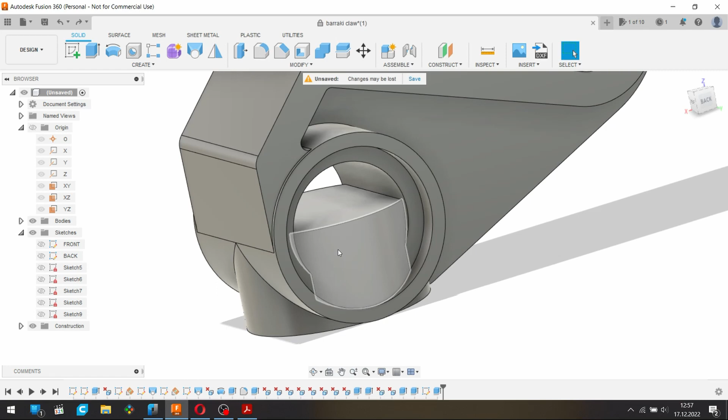So yeah, many ways to reach the same destination. This might be a good opportunity to show you the thing I talked about earlier, that with the delete command, the program kind of has to guess what you want to do. And I wonder if I can demonstrate this here. If I choose only this face and click delete, oh, it worked differently than I thought it would, but it also illustrates the point. If I choose only this face and tell the program I don't want this face here and click delete, the program has to work out how this part would look without this face in place.

It came up with something like that—the whole pinhole is cleared out, but the cylinder is left on this step, and this is obviously not what we want. So we can go back and modify our input and say, no, I don't want this face, but I also don't want this face, and I don't also want this face. Now click delete, and now the program knows what we are talking about and deletes all of that. So it's actually a good way to demonstrate the thing I was talking about earlier.

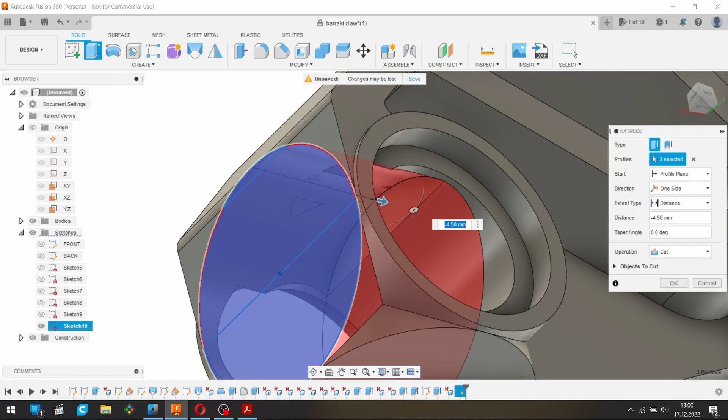Okay, again, we don't want this. We don't also want this.

Everything looks great here. And here is the connection line between those two cylinders that I didn't bother to draw. If I turn on the sketch, you can see that there is no actual connection drawn, because not only was it not necessary to create those shapes, it also might not have lined up even if we would draw it. So it turned up by itself either way.

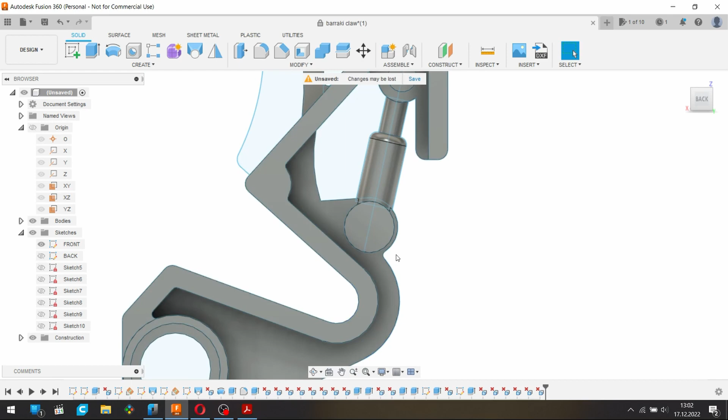Some weird geometry here, let's delete it. This side is clean, this side too. Okay, looks great. So let's just check one last time this part, this region of the part. Everything here looks great, this looks okay. So from this line down, everything is finished.

We can now focus on this part, and this will be really easy. Let's just extrude this first, symmetric. Let's measure the width on my part. The width is 1.23, 1.22.

Let's do 1.25. Not cut, join, okay. Now let's extrude this. No—did I hit? I don't know what I hit.

But I wanted to extrude. Extrude to, again, symmetric, and the distance is 1.48, so let's do 1.5. I know you don't have anything to cut, I don't want you to cut. It's okay, calm down, okay.

Now let's extrude those two. The dimension here is really tiny, let's get this right. 1.1, 1.1. Oh, join—he finally figured it out. Okay, those are holes, so it's okay.

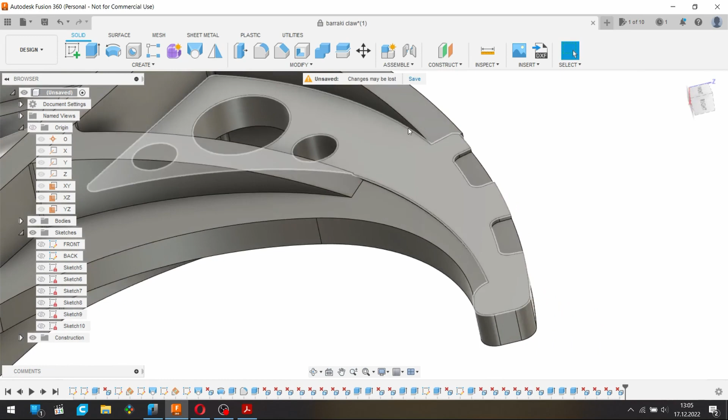Okay, that looks great. And the last thing to do is this feature that is the only reason we have sketch on the other side. There are a million ways to reach the same destination, but I'm going to do it this way, doing both sides one at a time because the feature is not symmetrical.

For this side, we're going to extrude to this plane. Wait, why is it not working? Extrude. Oh, I clicked the start, I wanted distance. To object, join, offset will be minus.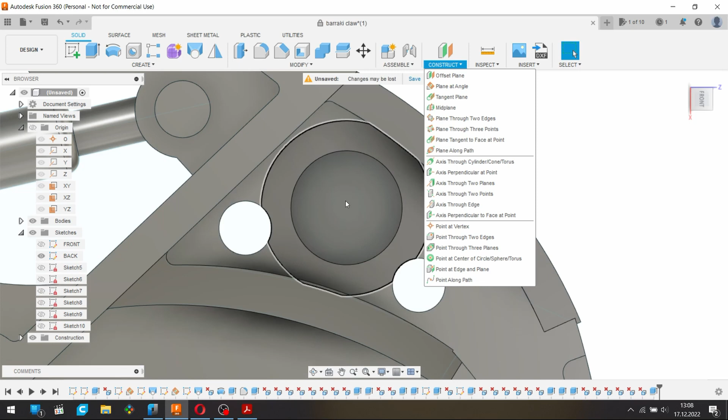The way I'm going to do this is revolve this feature the same way I revolved the piston. To draw the cross section from which I'm going to revolve this feature, I need a plane that goes through the center of this circle. As you may know, one point contains infinitely many planes - they can be at any angle as long as they go through this one point, so the actual angle doesn't matter in this instance.

First, I'm going to create an axis that goes through this point. I'm going to hide the body for a second. No point for me? No? Okay, let's do this the hard way. Edit point. Okay, now it will work fine.

So again, axis perpendicular to face at point, hide the body. I want this point, and the plane I want this one. Oh wait, again sometimes I have a little problem with Fusion still. So this plane and this point. Why doesn't it work? Wait, am I choosing the right command? Axis perpendicular to face at point.

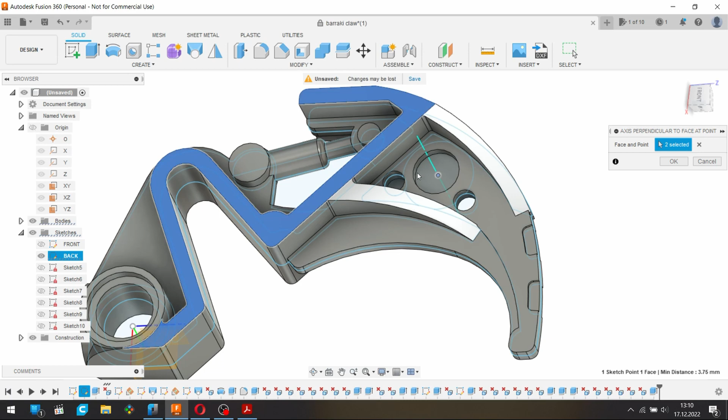What's the difference between axis perpendicular at point? This might work also by... why can't I use this one? Maybe I can't use the origin plane, maybe I have to use a body plane. Let's try it this way. Okay, I have no idea why I can't use the origin plane and have to use the body plane. What if I had no faces modeled yet, if it would be my first thing to construct? It's idiotic. Okay, whatever. Now we have our axis that will be the rotation point for this feature.

Now we need a plane that goes through this axis. You can see that's what I was talking about, the infinite amount of planes I can make at infinite amounts of angles - it doesn't really matter. For this particular instance, it would work the same way, so I'm just going to make this plane parallel to the origin for the sake of being neat, clean, and consistent.

I don't need to see this axis anymore, although it might work for the sketch. So let's just create the sketch. Let's hide the body for a moment, and the cross section of the feature I'm going to make is a part of a circle that's cut off by a line.

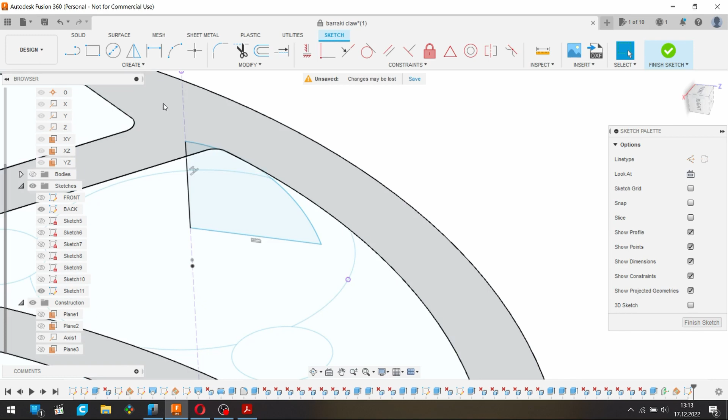As far as the height goes, let me see. Okay. I also need this. So this has to be here. Wait, am I doing this right?

No. This point is not supposed to be on the lower plane. It's the point where this new feature, this dome, intersects with this plane. So I have to raise it up.

It will all become clear in a second. Let me just fix this. You will see in a moment why it matters a lot. Okay.

And we need the height of the plane. This is also the thing I mentioned, that you can have a general idea how you are going to model something, but you just have to figure it out as you go along. There might be moments when you need to stop and think how to do the thing you want, because the way you want it won't actually work.

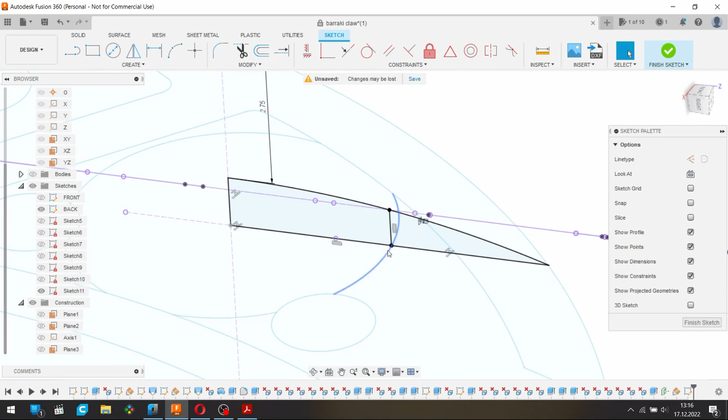And now I'll show you. Wait a minute. Okay. Now it's clear why. Let me just show it this way, why it was important to move this point from this plane to this plane.

You can see that if I used this point as the end of the arc, it would basically meet this point at the same place, but it would have a really different curvature, a really different radius, and it would not be accurate to our reference.

What I caught at the last moment was that while our reference sketch is at the middle of the part, we are looking at the part from the top, so the circle, which is actually a line where this plane and our feature, our dome, intersects, is not at this height, but at this height. So I had to use this point from our sketch that's this far from our axis, but it's actually on this plane, and the arc to be correct would have to go through this point and not this point. That's the realization I had, and the mistake I caught in time and didn't make.

So now we have our dome sketched the way we need. We can finish the sketch. We can hide the reference sketch so it doesn't bother us. And now the most satisfying thing to do after setting up a sketch correctly is to do the feature and see how it works out.

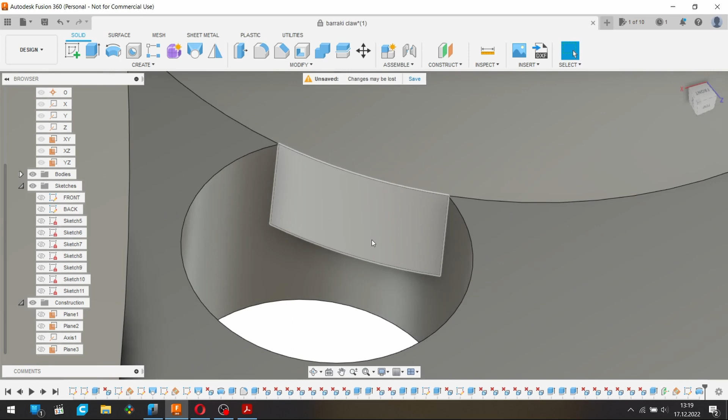One thing left to do is to clean up the geometry that might have spilled out of the walls. Nothing here, nothing here, everything looks okay. So this is the only thing we need to fix. This and this gone. This and this gone. Let's check the other side.

Everything looks great here, looks great here. Let's just do general... Oh, we forgot about the axles. So we are not quite done yet. Everything looks fine.

Now that I look at it, this arc that creates this face actually looks like it's tangent with this line. I don't remember if we did it that way. They are tangent. It doesn't really matter since they are separated by the wall, so you can't really check or find out that they are not tangent without doing some sketching. But if we didn't sketch them as tangent, then it looks like a mistake. They probably should be.

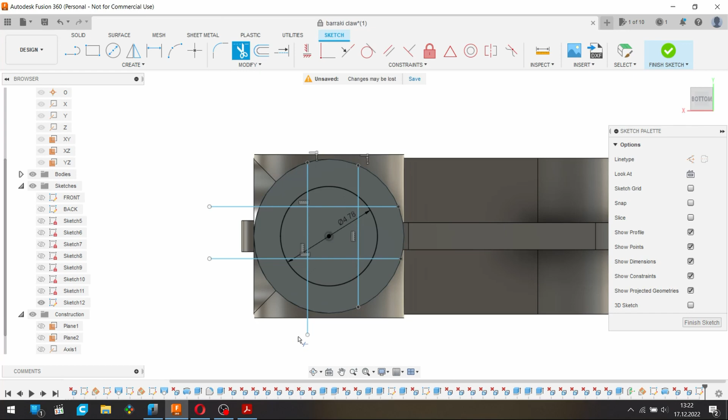Okay. While the pinholes and the outer diameters of the Technic beam are taken directly from Lego pieces and are standard and should fit the official parts well, the axle is actually sized for my specific 3D printer. So if you'd like to use those dimensions, double check that they work well for your application, because the dimensions of the axle aren't done the same way Lego does it, but basically the way I found works for me. So keep that in mind.

This dimension will be this divided by 2. This dimension is the same as this one. This dimension is the same as this one. Five. We're going to do the same thing here.

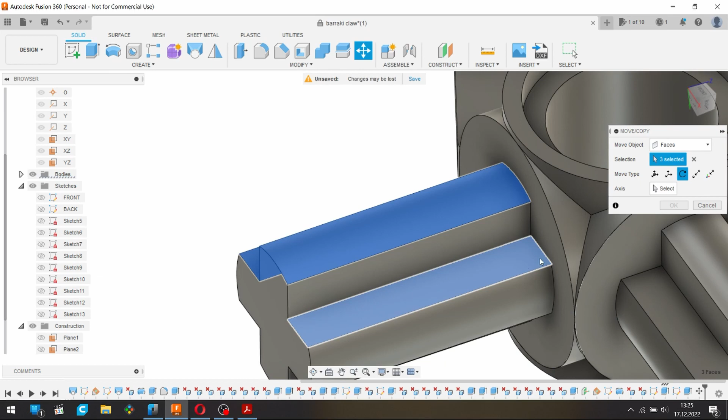Now I'm going to add a relief angle to the sides of the axle. Again, it's not how Lego does it, it's the way I do it. Wait, which one did I do? Okay.

Let's double check. Yeah, messed up, I did this one twice. So we need to do this one. Looks great. Now the other one.

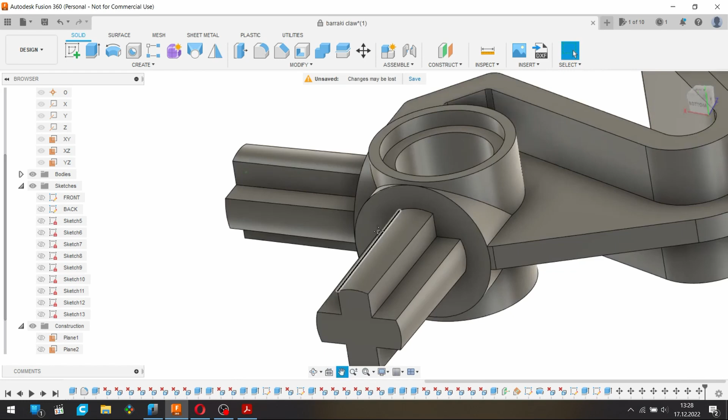So let's save our progress. And now if I show the sketch, you can see that the body perfectly aligns with the sketch, and that's because we worked directly from the sketch. That's the benefit of preparing the sketch beforehand, working with the reference. You'll notice I didn't look at the reference scan picture once during this modeling process, I looked at the physical part. I measured some dimensions that were impossible to take from the sketch, like the height of every feature, but other than that, the modeling was a pretty painless process because of the way it was done.

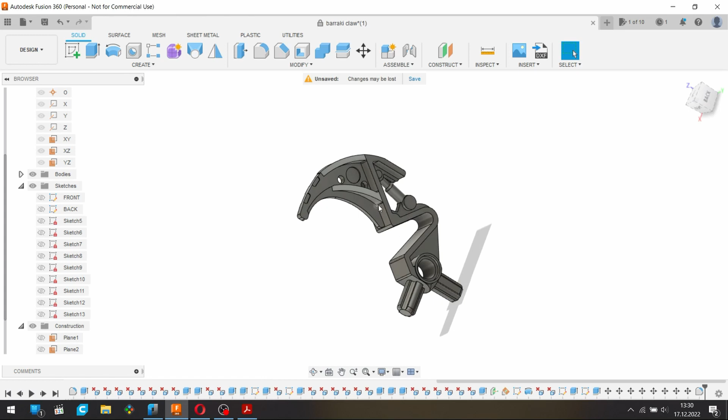And with that, this part is complete. It's ready now to be imported to Studio to use for digital building mocks, it's ready to be imported to CAM programs like Cura, to slicers, to generate G-code for 3D printers. It's ready to be used as a part of digital kit bashing. It can be cut up, it can be used to make other parts.

It's really great to have a part in this file format, the editable 3D model, because for example, if I 3D print it and find that the pinhole is too small or the axles are too big or whatever, I can just go in and directly edit the surface, make it smaller, make it larger. If I want to print this part without this axle, I can very easily choose faces like that with your mouse in Fusion 360. I don't know why the program chooses the whole body, let's try it this way maybe. Okay, you can very easily delete this face. You can delete even this cylinder, this feature. You can see the axle was never here, it's completely gone. So this file format is the best way to have parts, because you can do so many things with it.